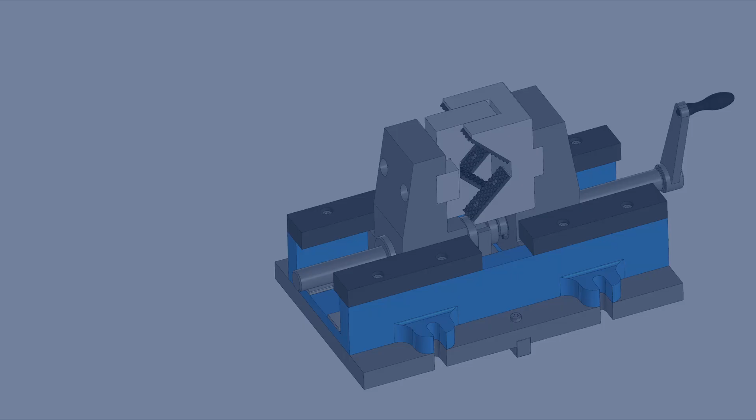In this lesson, we'll add 4 clamps to the assembly, and 2 of which will be added by mirroring. Let's add the clamp. The vise assembly contains 4 such clamps. We need to place them onto the base on 2 sides. As usual, click by matings.

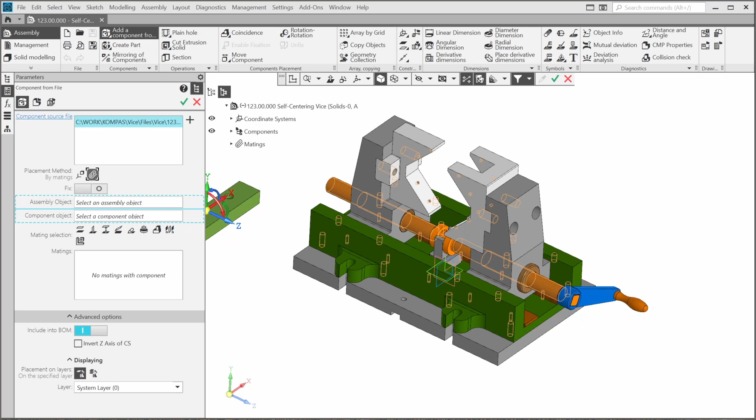Select the coincidence mating. Select the plane face of the clamp on the side that doesn't have counterbore, and the face of the base. Make sure that the clamp has the correct orientation. The counterbore should be facing up.

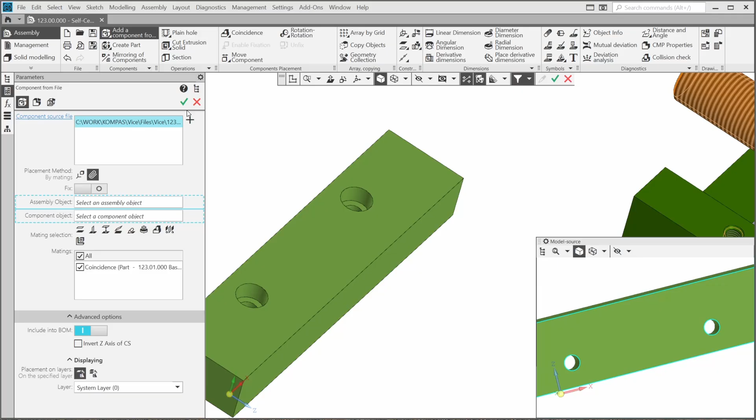Then create the coaxial matings for the clamp's holes. Note that the clamp isn't symmetrical, and the hole should be close to the outside of the assembly. And the second hole.

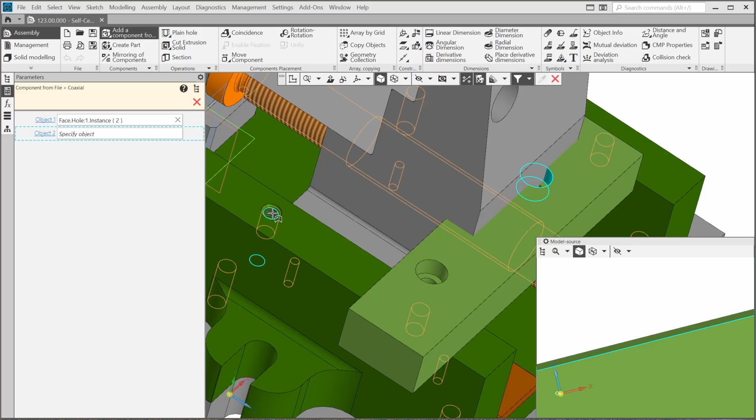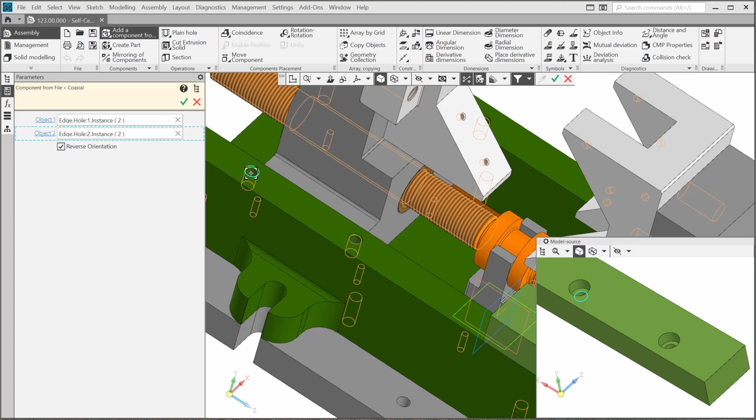Confirm. Let's add the second clamp in the same way next to the first one. Create 1 coincidence mating. And 2 coaxial. Confirm. For the other clamps, we'll use a different method. So let's stop the command.

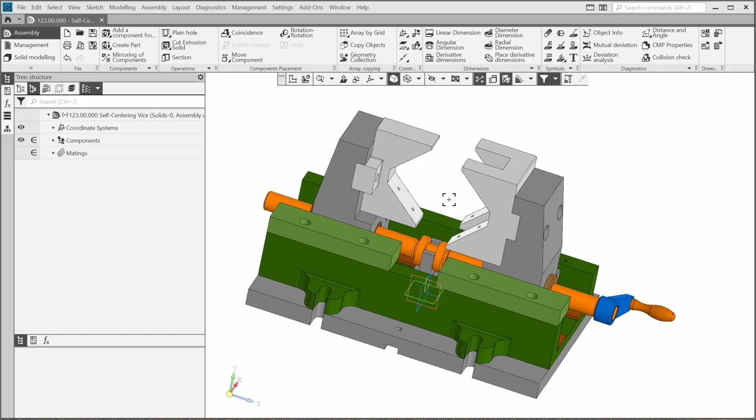I'd like to hide all these threads to see the assembly more clearly. The remaining 2 clamps should be placed symmetrically to the first 2 clamps. Let's use this feature and start the mirroring of components command.

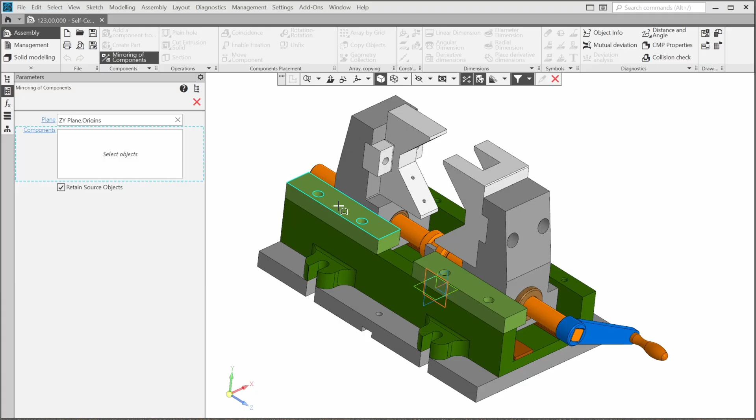First, we need to select the symmetry plane. As you can see, it's the red one. I can't select it in the graphic area, so let me turn on the additional tree. It's the ZY plane. Then select the clamps one by one. The preview will appear.

Note that there is a special button instead of the standard Confirm button. This button means we'll need to adjust some additional settings. Click it. The component mirroring window will appear. Here you can find our clamps. The window allows you to select an insertion method and choose from possible results.

There are 2 insertion methods. You can define the method for each component individually or for all of them at once. If you select the mirroring of component method, a mirrored copy of the component will be created. This is recommended for non-symmetrical components.

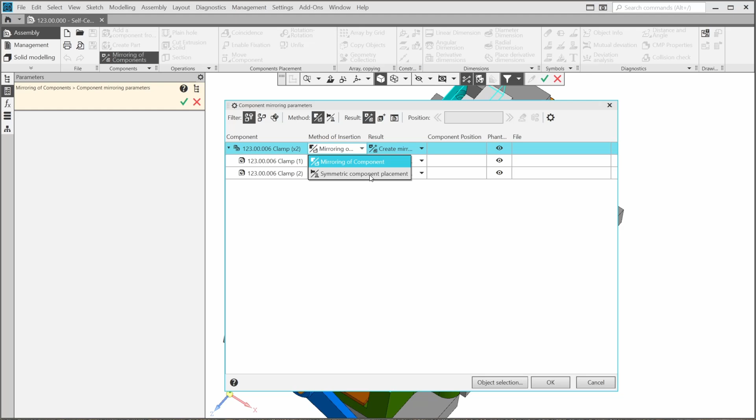In our case, we'll use the symmetric component placement method. In this case, the same part will be added, but in a mirrored position. The clamp is not completely symmetrical, so we'll get this incorrect result. To fix this, we'll use the result options.

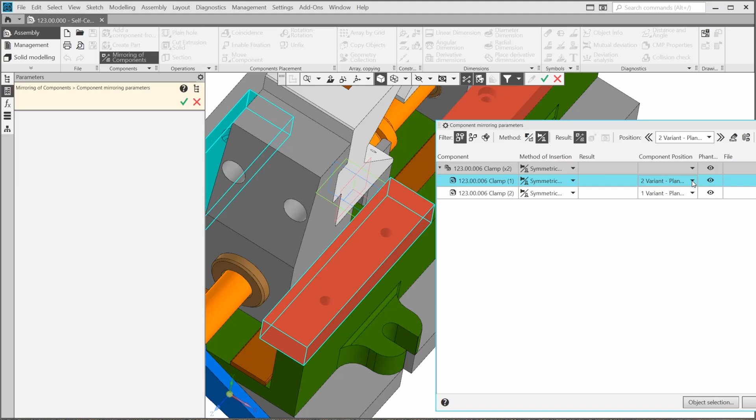There are a lot of possible results. Let's try them and find the best one. Here the counterbore faces down. Let's try the next option. This one is perfect. Select the same option for the second component. Note that you can use these arrows to switch between result options. Click OK.

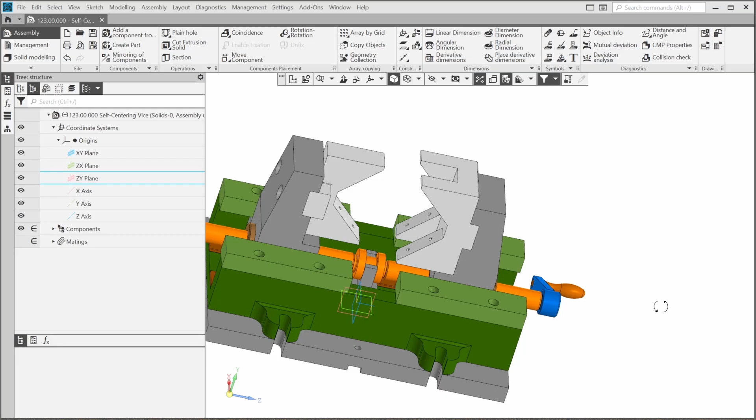2 more clamps have been added. Let's look at the tree. There is the clamp, or more precisely 4 clamps. You can see the number of elements in the parentheses next to each component. Note the plus sign next to the clamps, meaning the component's position is completely defined.

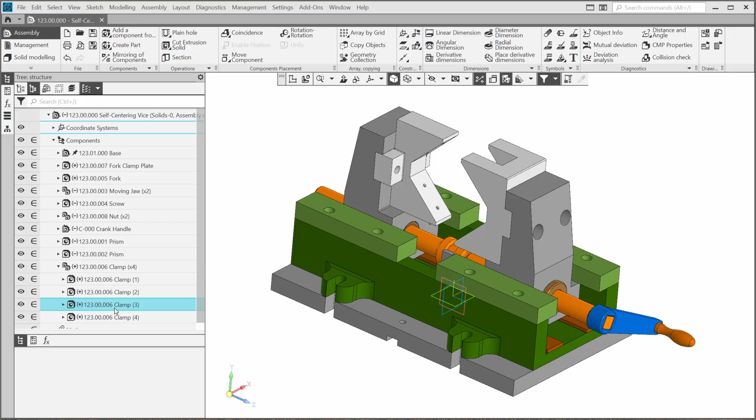Double-click one of the 2 mirrored clamps to review its matings. You'll find only 1 symmetry mating in the matings field, so we can conclude that the symmetry mating fully defines a component position in the assembly.